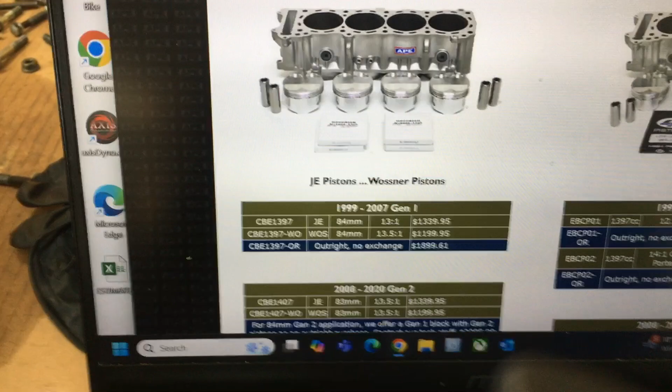Depending on who they order parts from, I'm going to get it right on the internet here, it's the best way to do it. Let me get this squared away. This is from Hayabusa Zone APE.

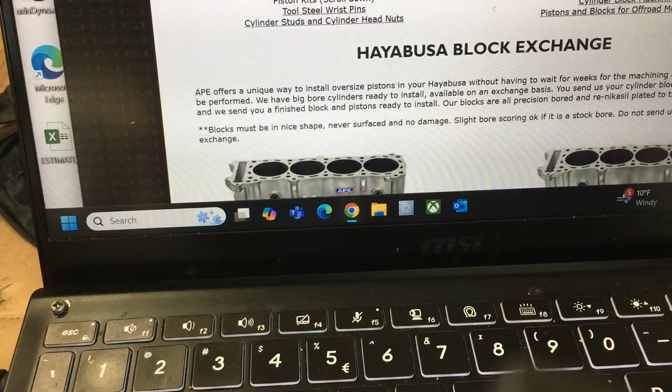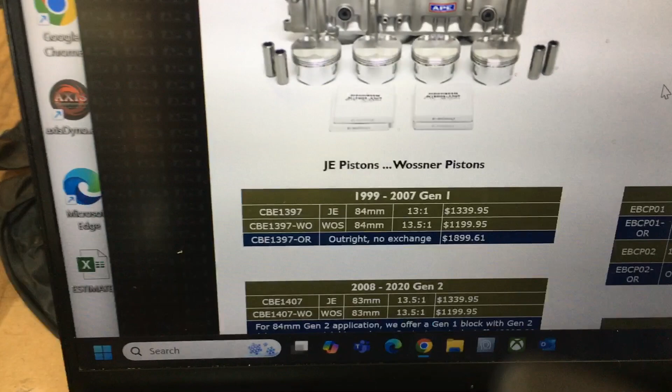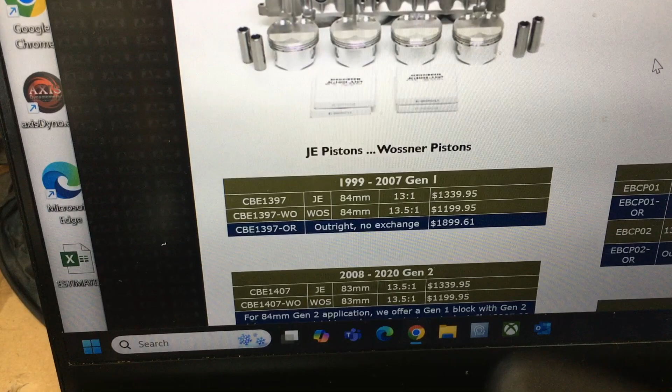So, depending on what a person wants, say they just want an entire, what we call, ready-to-go kit, you can see we can go down in here. For the 99 through 07, you've got a choice between using JE pistons or Wossner. This is for basic 1397.

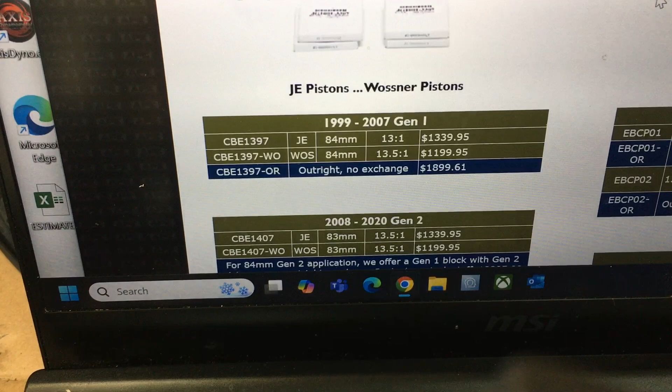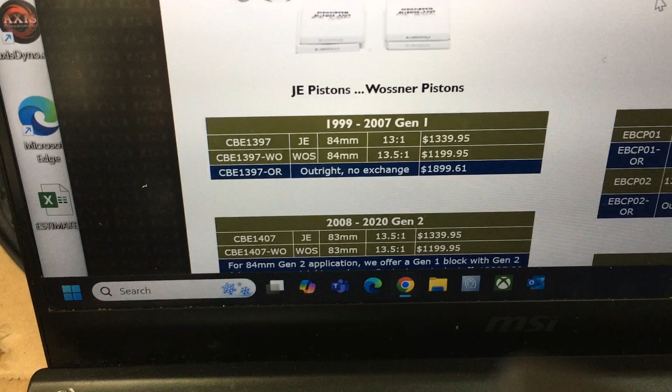This is actually the same exact motor that I received and put together last night. I got the kit basically just like it is. I used Wossner 84 millimeter. I also have another block that I use - I set the Wossner aside, but I had a straight Suzuki block already bored and honed to 84 millimeter that I used.

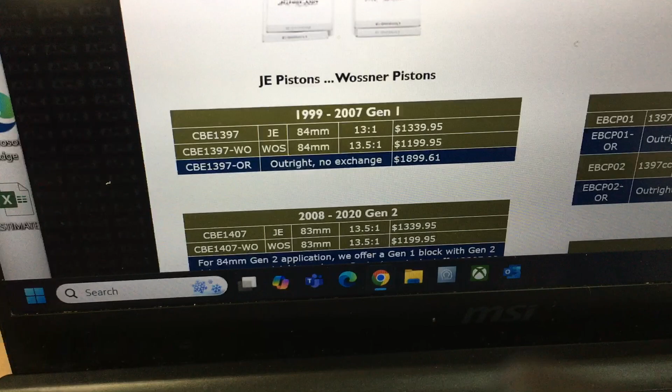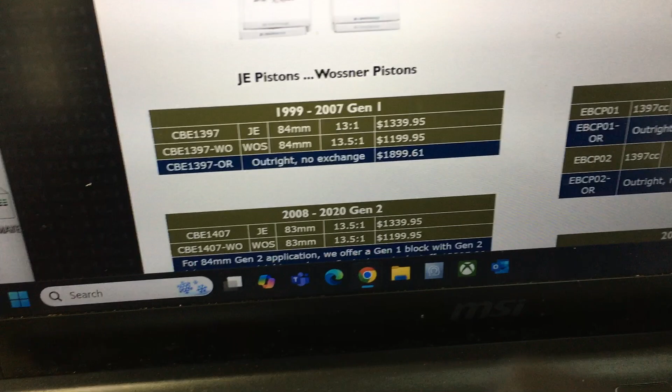As you can see, there's a price difference if you go between JE and Wossner pistons - it's Wossner, whichever one it may be. Let me find a pointer so I can make this easier.

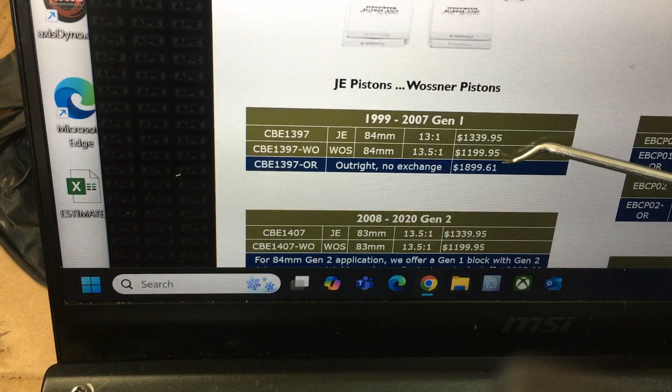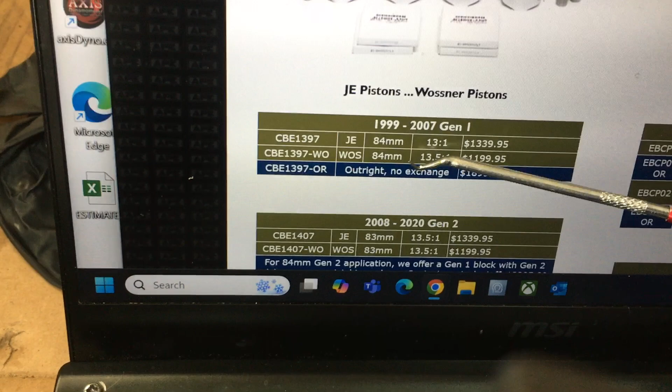All right, this is for your block and your pistons. On this particular kit, you see right there - 1397, JE pistons, 84 millimeter, 13 to 1 compression, 1339. Now that's just for your block and your pistons.

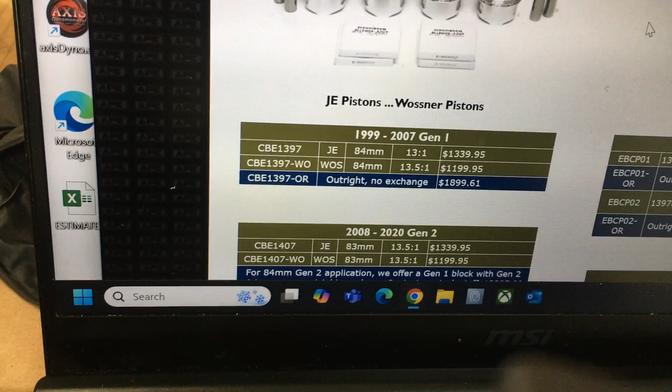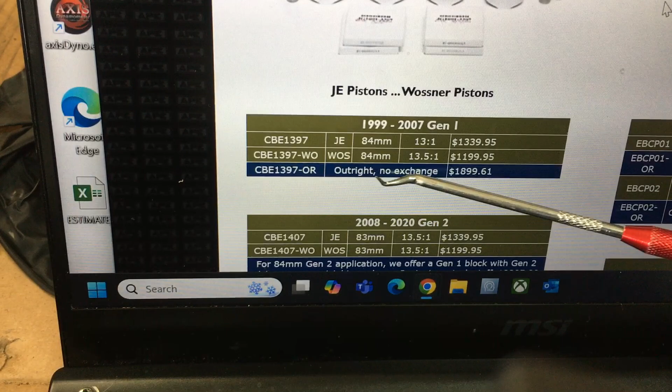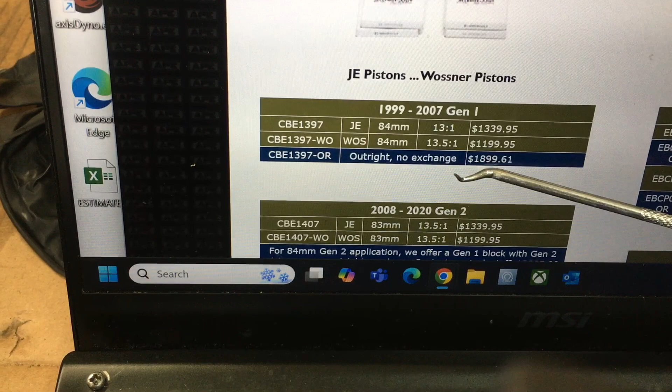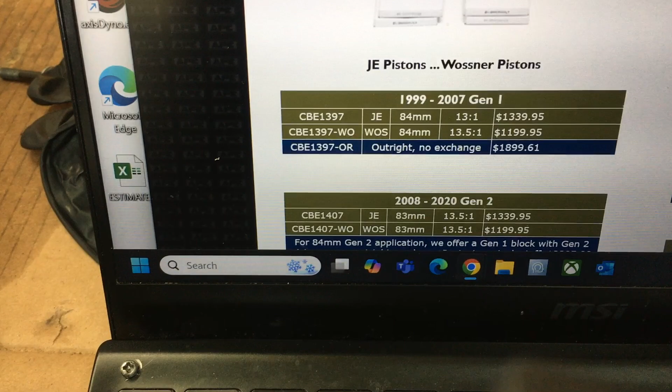Now, if you see down here in the blue, same thing, 1397 piston - this is for an outright, no exchange, meaning you don't send in your block as a core. This whole kit will cost you $1,899, so just say $1,900. That's the basic cost of your block and your pistons.

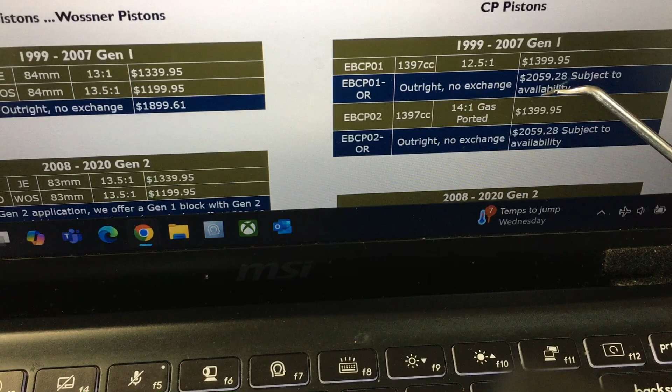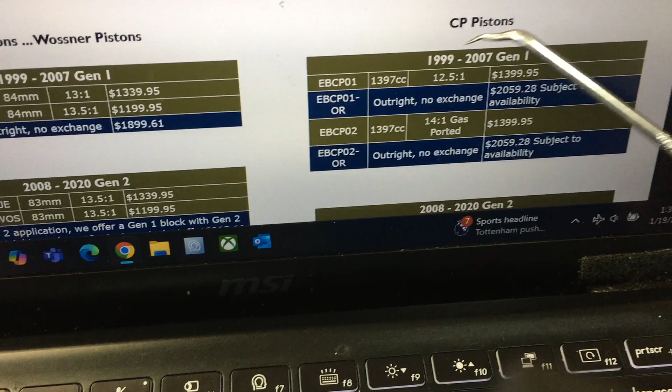Of course, you can go up and down depending on your money - you can choose. If you go over here to the other side, here's the same kit, 1397, 12.5 to 1, 1399, outright $2,000, basically just say $2,100. These are using CP pistons, so it depends on what piston you're going to use, because you'll end up with different prices.

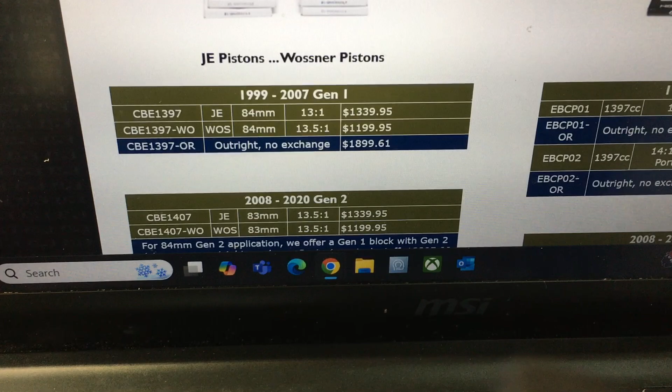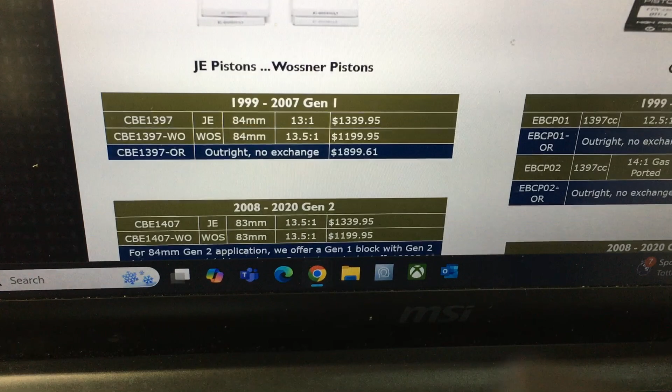But as you can see, those are actual prices right there - that's where you're going to end up. And that's without your base gasket or your head gasket. So for both of those, add another - just to clear it all up, add another $175 for your base gasket and your head gasket. That'll give you an idea.

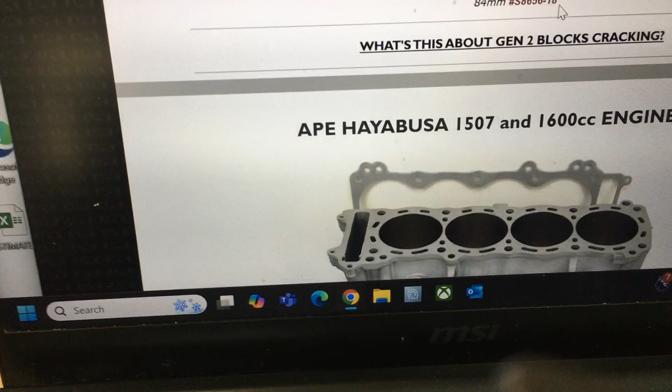Now, as you can see, the more you want - put it like this - with the 1507 1600 engine kit, you throw in the block, the pistons, the rod, and a crank, and look where your price jumped to - $3,745. Whether it's Gen 1 or Gen 2, you're going to be somewhere around in there.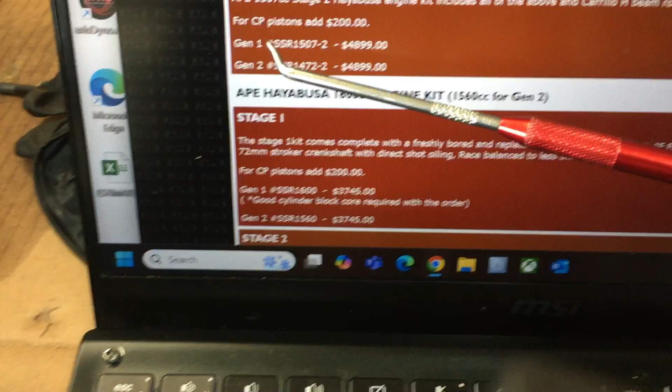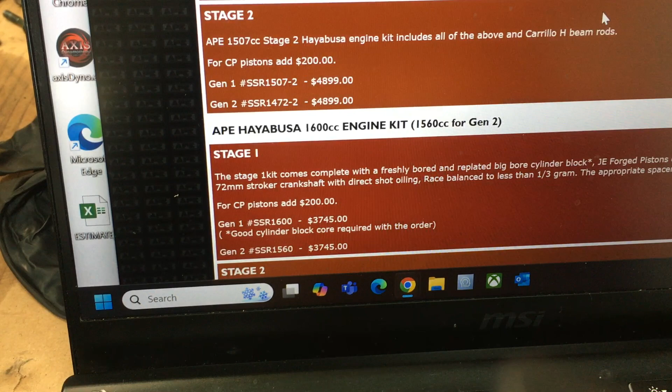When you get up here and want to go into a Stage 2, which is APE, you're talking - by the time you get where you need to be - $5,000. So you could be at $5,000 and all you have is a block, a piston, some rods, a crank, independent of what you want to do with them. So you see how expensive this process got, and you haven't even added in the labor and a lot of the parts that you need.

We haven't even spoken of cams yet. Let's go right now, because I got cams yesterday too. So let's do this and find some cams. I only use Web Cams, I don't use any other cams. So let's just say these cams right here.

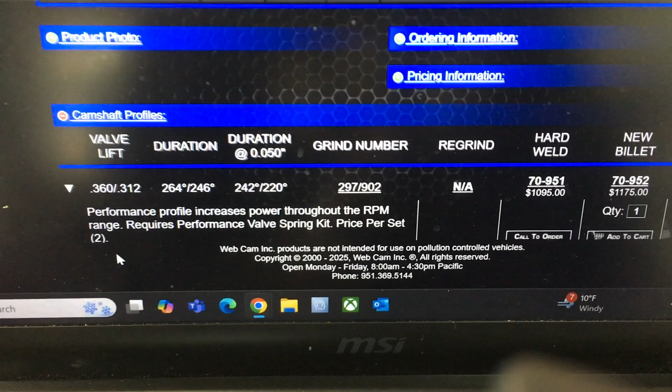These are little simple cams right here to put in. No big deal. But if you notice, even these simple cams, it says right here, require a performance valve spring kit.

So now you're looking at another $200 added to the price of these cams. Well, if you look over here, they've got these cams priced out right now. Hard welds, $1,100, just say $1,095. They've got it right here. If you want them billet, $1,175. And now make sure you add in core cost on this, because they need a core. So now you add in your shipping and handling both ways.

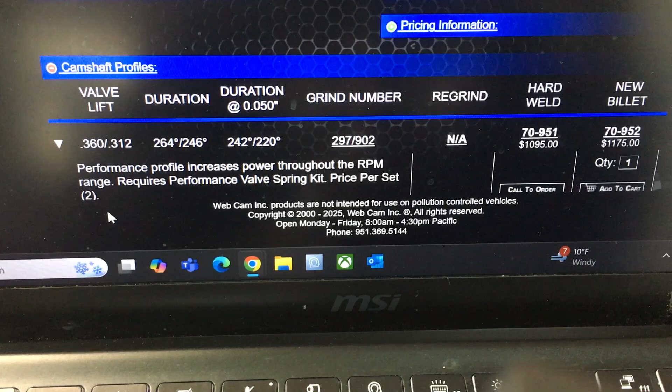So as you can see, let's just say right now with just those two items sitting on some cams, you're at $6,000. You're at $6,000 and you haven't even got your mechanic's labor in that, and you still have some other shipping stuff you have to do. So you're at $6,000 right now. Just that simple. It is what it is.

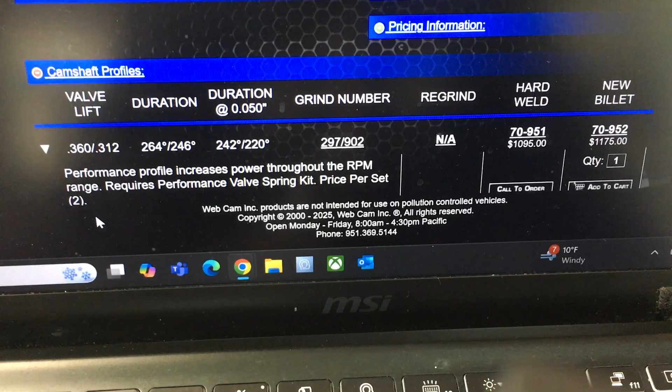I believe these guys were calling me and asking, really, why is it so expensive? Well, it's not. It's not. I haven't even put my labor in here. I'm at $6,000 and I haven't even put my labor in here. If you brought me your motorcycle raw, rolling on its tires and wheels, I've got labor from the time I start taking the engine out and breaking it down just to put this stuff in.

So you got to look. A mechanic can't work for free. It just doesn't work that way. Some guys, I believe, think it works that way. It does not work that way. Whenever you decide that you're going to build an engine...

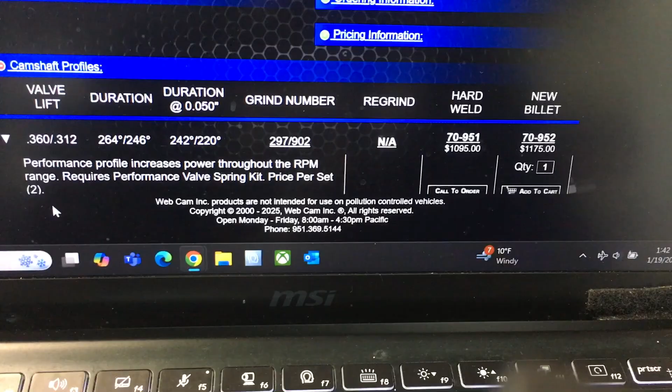I know most dealerships around charge 100 plus an hour. I don't charge quite that much. I own my building, I own my parking lot, so I can do different things. I don't have that overhead like that. But most anybody that's building in a retail spot is paying, he's got so much overhead that he's got to charge to pay his bills. And don't get me wrong, I don't blame him for the work we're doing on these engines.

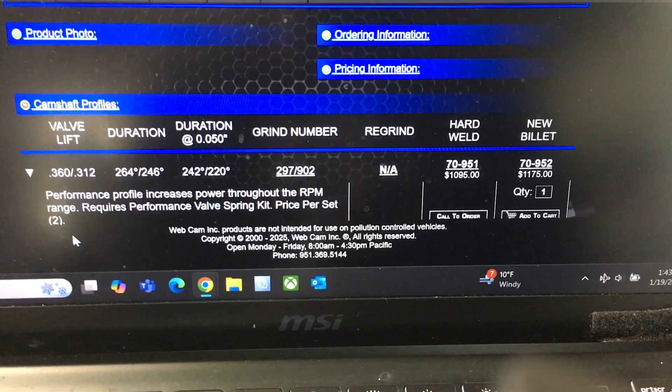If a guy's not charging somebody, an individual that walks in and says hey I want to get my... I'll just stick with what I just built last night, what I just got parts for, a simple 1397. That's all this is, it's just a simple 1397. So basically I'm basing it off this. I had a 1397, and by the time I got everything to the door, because I got gaskets, base gaskets, head gaskets with it, the whole block, the pistons, the rings, which all came in a kit, everything, by the time I got done with everything, got the shipping here, everything, that ended up being I want to say $1836 to the door.

All right. I also had a set of cams come from Web Cam. I sent them cores, so that was shipping out, them packaging them up and shipping them back. Who do you think's paying for all that shipping? Web Cam's not paying for that shipping. That shipping's going to be on the customer. I think it was $48 out, and probably going to be the same coming back. So let's just say $100 tied up in shipping out and back, which it was.

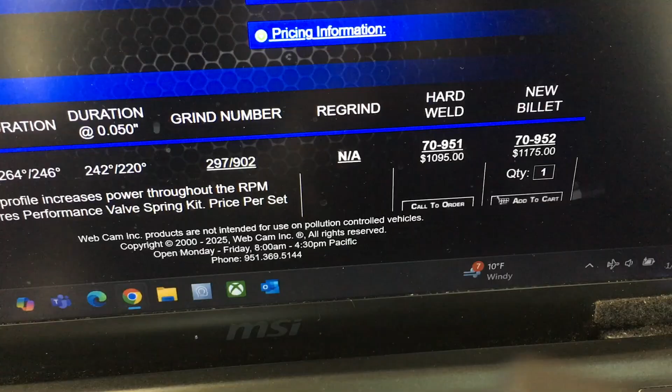And the cams, as I say, let's get right here and look. The cams were basically $1,100 because I had hard weld. So right there, $1,200 in cams. Let's just break it off even money. Let's say already, just in this simple build, no big deal, I'm already sitting at $5,000, and it's just a simple 1397.

Where I don't have to do any machining to the motor. I don't have to do any honing. I don't have to do anything. This is just the kit you get. And if you have the proper tools and you know how to measure and check your valve clearances and do everything, you can sit this right in there.

And by the way, I just said something else. Another thing that you're either going to have, or you're going to have it - there's no way you're going to put your cams in, put this whole motor together, and you didn't buy any valve shims. You don't have a shim kit. So go on and throw in another $100. 150. Matter of fact, just say 200, so you can get a couple of kits, and you might need to special order some shims, because a lot of times you get caught on in-between numbers that work out better. So throw in another couple hundred dollars there. So let's just say $5,200 is where I'm at now.

Now you're starting to see where the price of a motor is going. This is expensive. This is not something that is not going to cost you money. I'm just going to say it the way it is. This is something that's going to cost money. I'm at $5,200 right now, and I haven't made a dime labor-wise. And just think, when I get the motor complete and done.

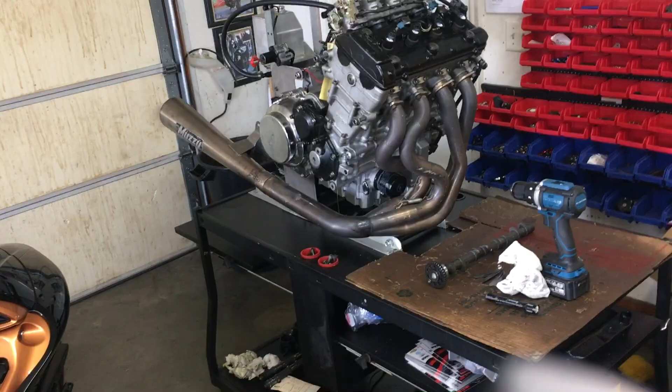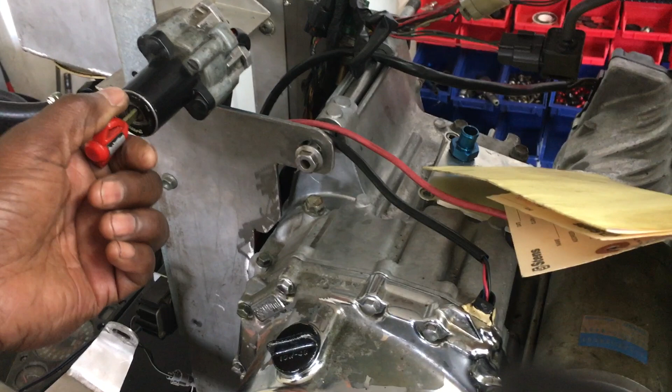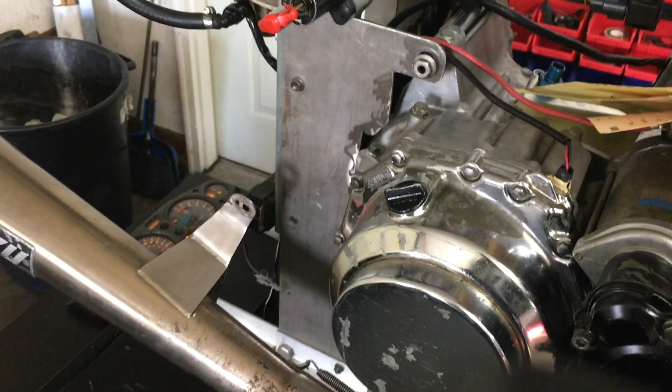So anyway, I got this. This is a simple 1397, and I started on it last night, and there it is right there. I've done all my little test work on it. I started it up last night, and she fired up, sounds good. Matter of fact, I'm gonna start this bad baby now. But this is a 1397 with Web Cams. And I'm really not done. I think I could get some better cams in it, so I'm gonna play around with it a little bit and see what I can do. Let's get this thing fired up.

And that's what that is. That's a simple 1397, got two sets of Web Cams sitting on it. What else would be special about this motor? Nothing. It's just going to be a nice little street bike motor.

Nothing. Now, if a fella comes in and says, well hey, I want that motor, and I'm just going to put it in my stock bike, I'm going to say, well, you're going to waste your money. That's what I would tell him right off. Just leave that motor right there and leave your stock motor in there, because you're going to make a little bit more horsepower, but you got to get the bike, get some things done to your chassis so that the bike will leave, so it'll do what it needs to do. And that could be anything from putting a shock on, lowering your suspension, whatever it may be.

But this is expensive to do, and it just costs money to do it, and that's all I can say. As you can see, I just showed you the factual numbers out of the book of what this engine sitting right here costs. And this is a low budget, basically, engine that needs to go into a stock bike with a little bit of chassis work around it, and the thing will get out there and go.

But anyway, this is just a simple 1397, and I'm going to end up putting this motor in something. Don't know what I'm going to put it in yet, but I'm going to put it in something. Anyway, this is Charles Willis Racing.

Need something? Want to know something? If I don't know, and getting back to my point about this, if I don't know, I'm going to definitely send you to somebody that I believe knows. And we've got people out here that you can get on the internet. You can get out here, and I tell everybody, hey, you're only fast till the fastest guy comes along. And if you want to get into that category of 'I'm the fastest,' I would say don't come to me.

You better go to DME. You better go to Rodney Wilford. You better go to HTP. You better go to, what's that? They got one, WMS. You go to somebody like that. If you want to rule the world, you need to go to somebody like that. I ain't even going to try to take your money. I ain't even going to get into no racing, high dollar situation with you. If you want to go rule the world, I cannot build you a motor to rule the world.

You have to go to those people over there. Look them up. I just named some of the fastest people in the country, and look them up, and you can go and have it, man. Just rule the world. Like I said, rule the world.